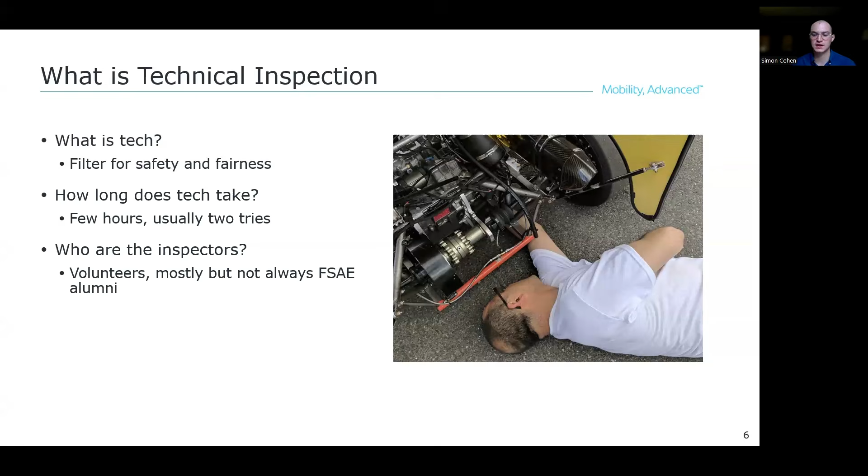Now, a quick overview of the actual process of going through tech. Tech for the EV event is going to be like an assembly line. You start at one end, you go through each station. At each station, you will be teched on one particular aspect of the car. One or two stations, usually at the end, will be EV powertrain tech. This is where I will be. I will have seen all of the powertrains of all of the cars that have come through that day.

So let's talk about what you can do now to make sure that you breeze through tech inspection. This is general advice, not necessarily specific to powertrain. The best advice is to give yourself a buffer. Don't build to the edge of the regulation. If you're close or you're barely over, it will take extra time during tech inspection to figure that out. If you build to the line today, you will likely be over on the day of competition.

If the rules say that you need an inch of clearance, please give yourself a little bit more. Now, be extra vigilant and extra critical. You can always do the inspection yourself and see what parts pass and what parts fail. It's common to have alumni come in and help with the inspection checklist. We all know that alumni can pick apart their team's car like no one else.

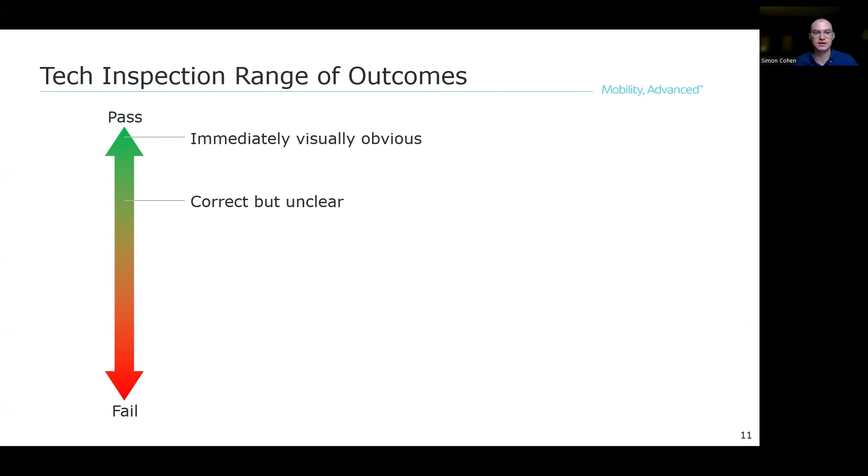There's some stuff that's correct, but it's a little unclear. Maybe it's hidden. Maybe it's a little close. I have to pull out a tape measure. And then the things that take the most time are the things that are not strictly correct, but they're safe, they're minor. These are frequently the source of arguments.

This is an escalation to maybe the chief technical inspector. This is kind of the area we want to stay away from. This is why building in that buffer is so important. Then, of course, there's incorrect, but it's unclear. We still have to take that time to figure it out. And then another quick one, immediate and visually obvious. We really want to stay at the top of this.

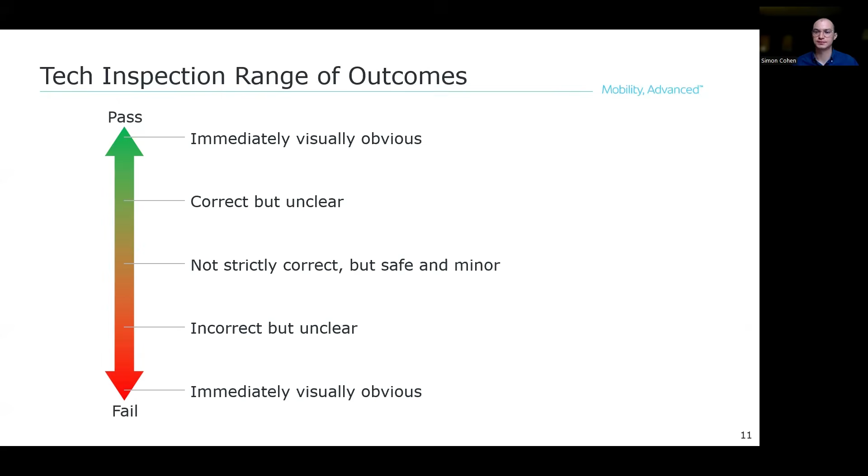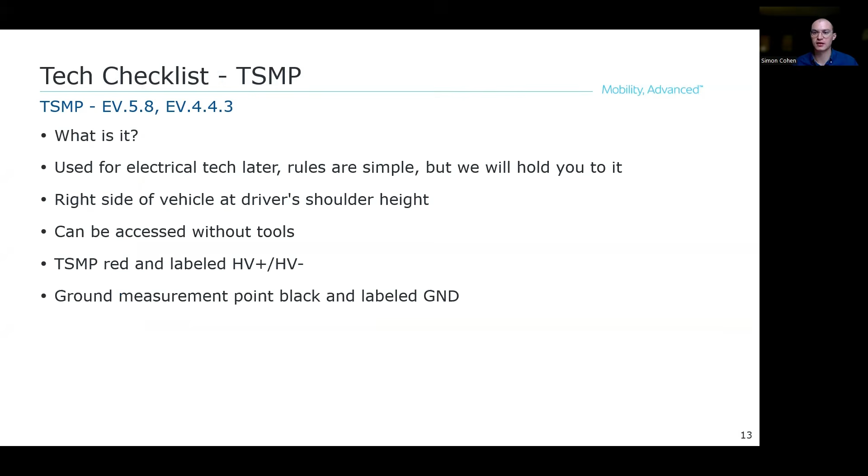So the first item on my checklist is the TSMP. What is it? This is the tractive system measuring points. These are used for electrical tech after you pass mechanical tech, so we won't be plugging anything in. It's got to be in the right location, has to be hand accessible, has to look right and be labeled right. Ground measurement point also has to follow some rules.

Now, you'd be surprised how big of a hurdle this can be. Some things that I've seen go wrong: the wire color, the jack size, the jacks not being shrouded. And weirdly, the biggest hurdle I've seen teams face is just not labeling them. This is one of those things where, again, it'll take 3 minutes to solve in competition. It'll take 30 seconds to do it now.

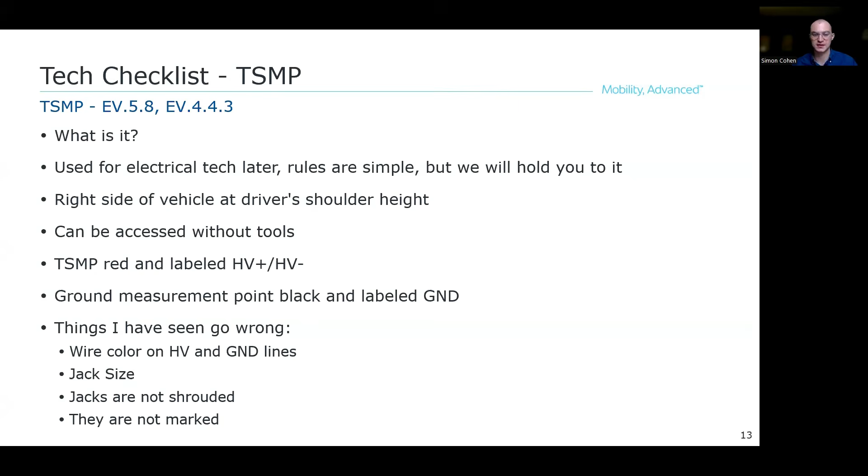Here are a few easy slam dunks. We will be checking your high voltage gloves. If for whatever reason you like using a pair that is out of date or not in good condition, please leave them in your pit. Do not bring them. We do not need to see you use them. We just must see that you own them.

We will be asking what kind of coolant you run. If you use water, say water. If you use oil, say oil. If you say anything else, you will not get your tech sticker. I'm not taste testing your coolant, so this will be done on the honor system. If it becomes clear that you're not using pure water, that's pretty easy to rectify.

High voltage stickers are easy enough. In all of the years that I've volunteered, we have had them to distribute for free. However, as discussed earlier, this is really easy to do now, and it will just suck up some of your minutes at competition.

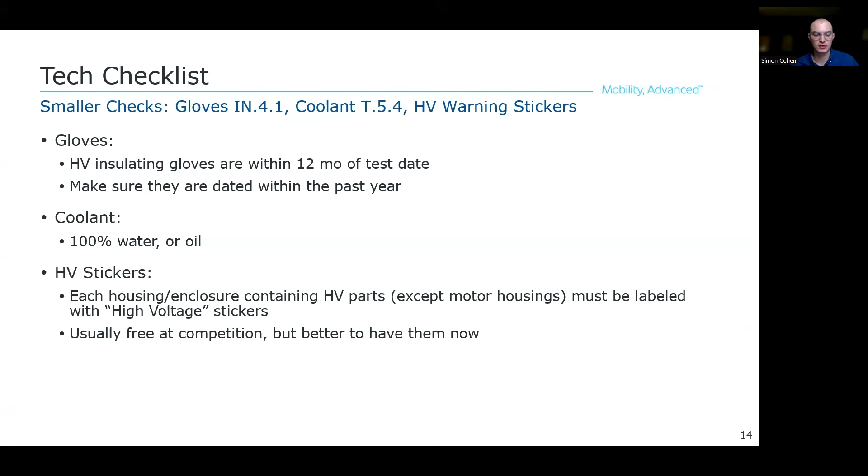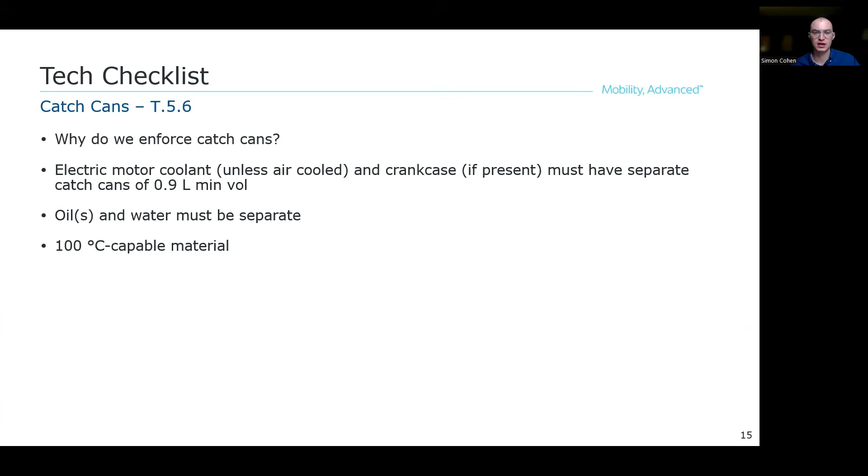Now, catch cans. Why do we enforce catch cans? It's for safety, it's for sportsmanship. We can't have slippery liquids all over the race course. They have to be of a certain size. They have to keep oil and water separate. They have to be temperature rated. They have to be in a specific location and follow other specifications, as well as certain systems need them. You have to be able to demonstrate the two big things to me: how big is your container and how hot can it get without melting.

Let's talk about Nalgene bottles. We are told at tech training to specifically focus on Nalgene bottles. Yes, they're big enough, and yes, they're temperature capable. But if you cannot demonstrate that to the tech inspector, you should not be getting your tech sticker.

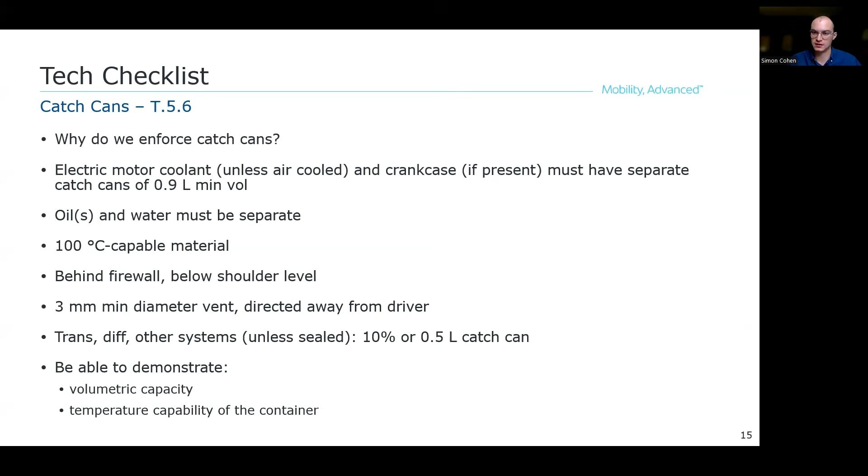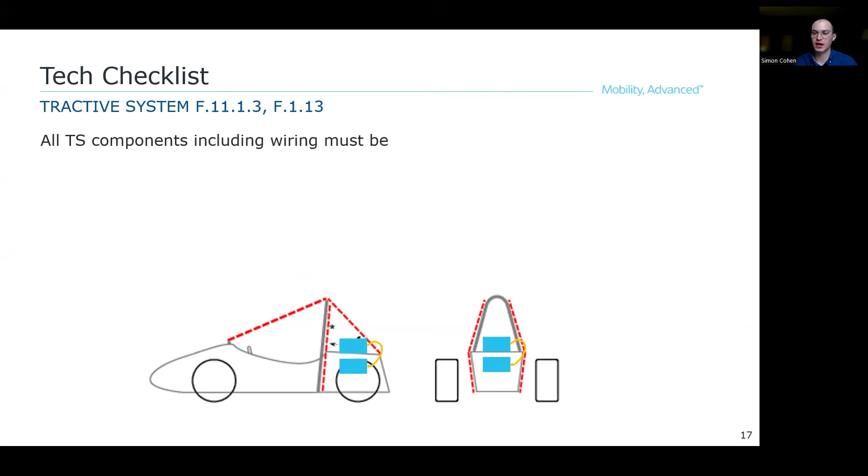So one of the more exciting checks that we get to do is checking that everything that propels the car forward lies within the rollover envelope. Now, this is everything except for outboard motors and their associated wiring, and it cannot be below the chassis. Usually, and hopefully for everyone in this room, the easy part is that all of your hardware, your inverters, your batteries, your PDUs, your controllers lie inside the bounds specified by the rules.

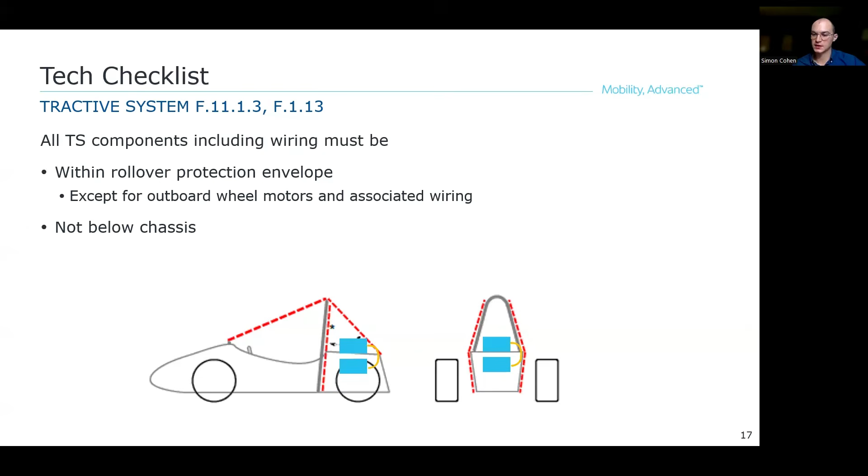What trips a lot of teams up here is the wiring, most frequently the high current wiring. Now, as teams package their inverter for the best mounting and their motors for the best power delivery, everyone has forgot that a 25 millimeter squared wire can have an unfortunately large bend radius. Give yourself some extra space now. Make sure all of these wires are within that rollover envelope. Otherwise, please expect to bring some zip ties with you so you can secure it in place.

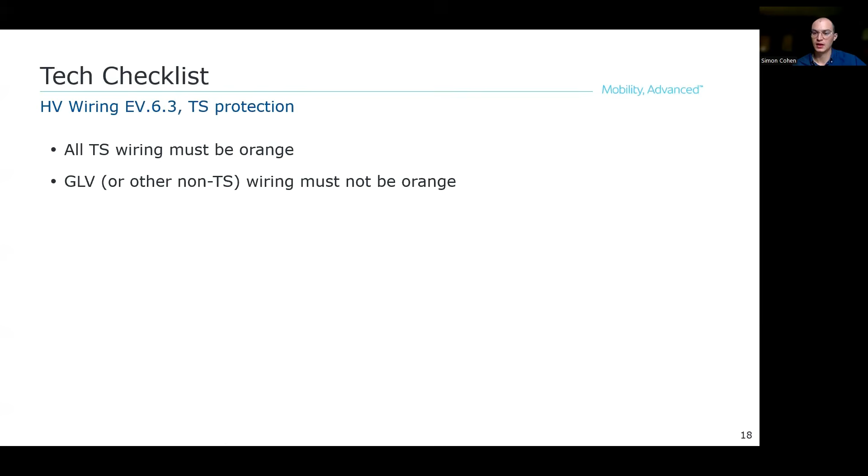Now, the wiring you use for this must convince us that it's not going to fail and it's not going to cause harm. All your tractive system wiring must be orange, and orange cannot be used on non-tractive system wiring. It has to be shielded from damage, and it must have strain relief. And you cannot run your tractive system wiring and your low voltage wiring in the same conduit or connectors, except for interlock connectors.

Now, with this wiring, you must not be able to touch the conductor with a 100 millimeter by 6 millimeter probe. This is a stand-in, of course, for a finger.

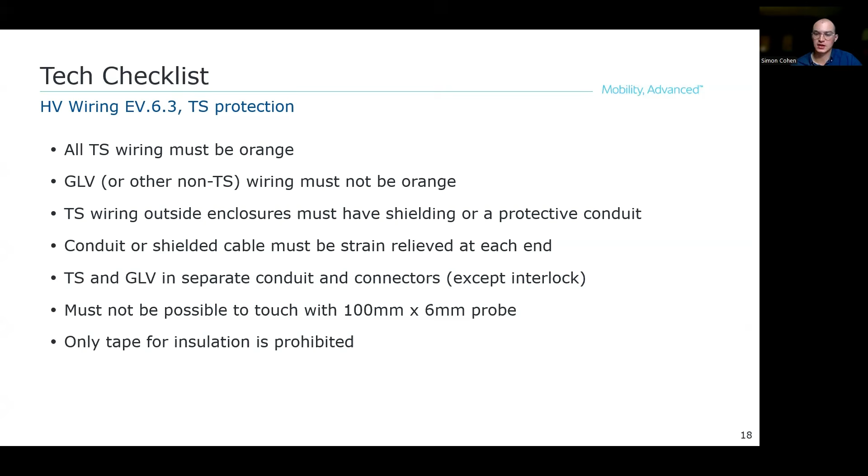Using only electrical tape is prohibited. Again, that's one of those things. Buy the right stuff now. Very easy, inexpensive. If you're at the event on the day and you don't have electrical heat shrink and you don't have a heat gun, this is going to make your life a lot harder.

For outboard wheel motors, now, has anyone watching seen either their team or another team face partial or complete suspension failure? This happened in 2017. This rule is so that your shutdown circuit opens if the wheel assembly is damaged or knocked off of the car. We need to ensure that your HVIL opens in the event of the wheel actually coming off the vehicle. I will be quite harsh on this. Others may be less so.

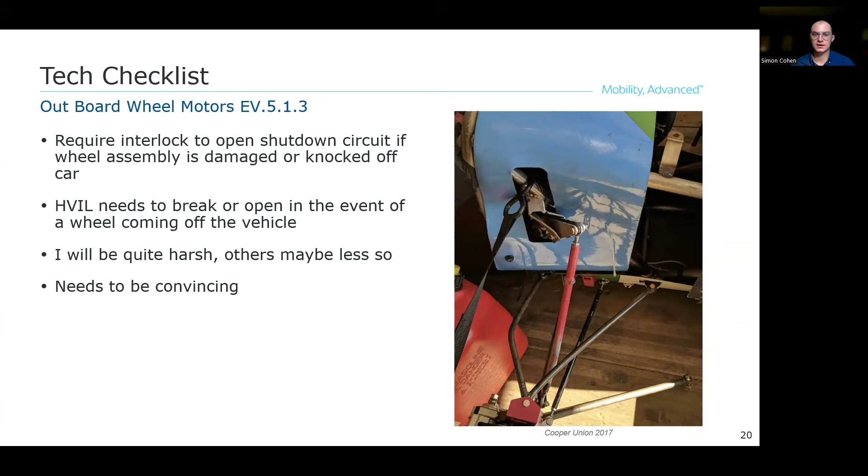The main thing about your HVIL is it has to be convincing. We'll go through a little bit about this next. There are really only two different methods that I've seen for this. One is opening the circuit by either unplugging a connector or actually ripping the pins out. The other is designing the HVIL wire to be cut, sheared, or snapped in the event of a crash.

Major issues that we see during tech: the HVIL is loose, unconvincing that it will actually open in the event of failure, or using inappropriate plastics. Fishing line, etc., will soften, it will weaken, it'll stretch.

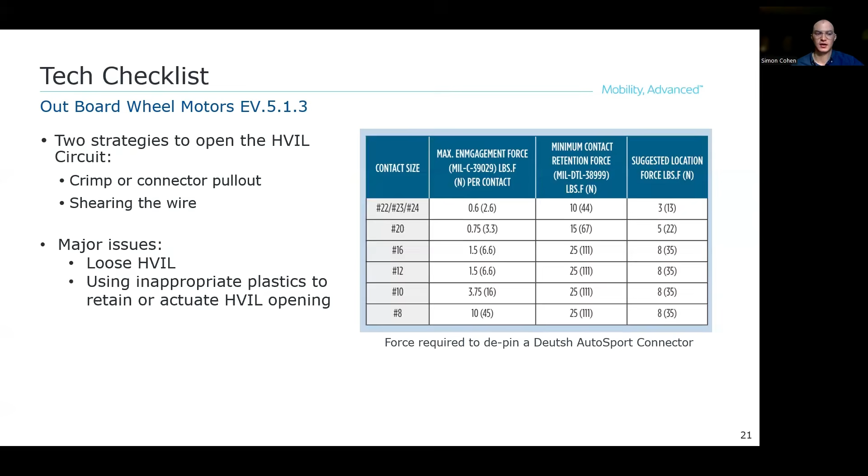One of the more time-consuming checklist items can be your grounded low voltage fusing. All of your wiring must be protected with a fuse that is less than or equal to the ampacity of the wire itself. This can be really time-consuming to tech. And not only does this apply to wires, but also to any PCBs that carry your GLV power and the traces in them. So please be able to give us the ampacities of your PCBs. Usually we recommend having a spreadsheet or a printout, a document that you can bring with you. These are the big things. You need to be able to demonstrate your fuse rating and the ampacity of the wire. This is made easier for you frequently and much easier for us always by having a centralized fuse box.

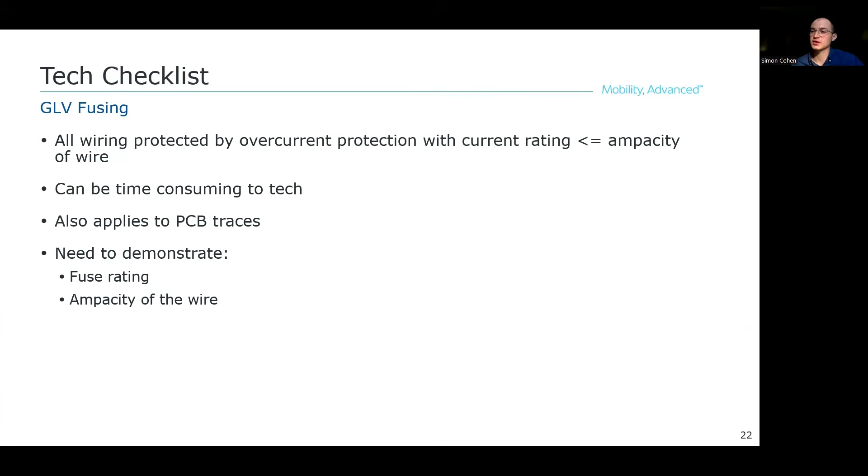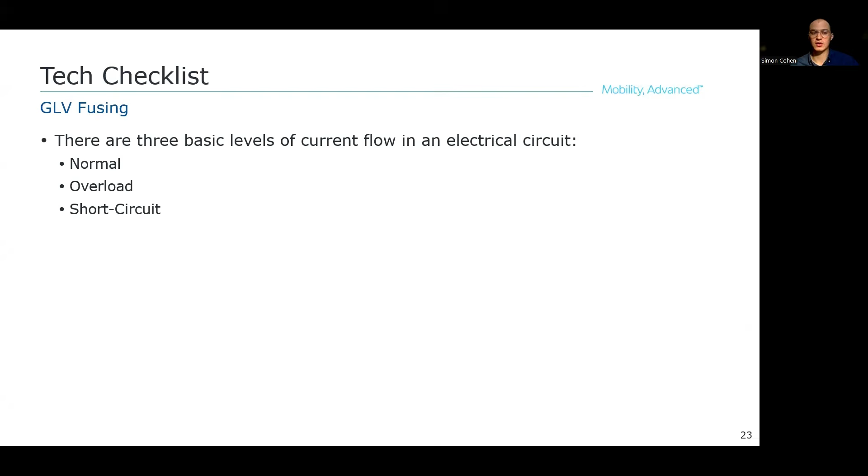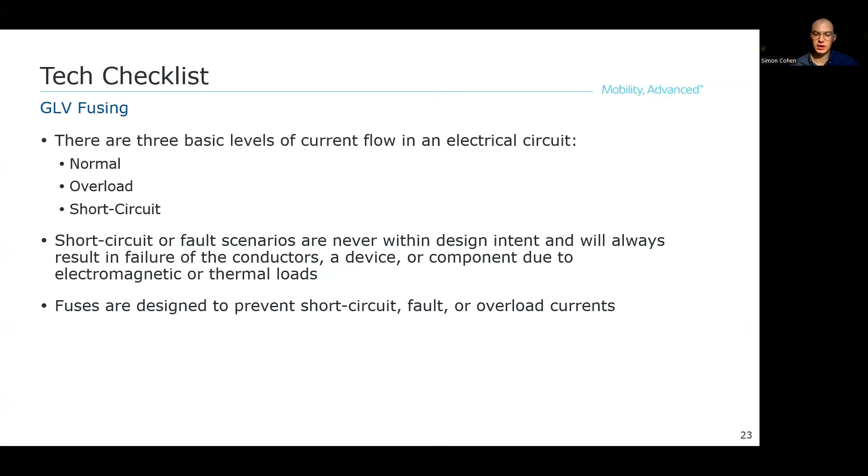Now, let's go a little bit through what fusing actually is. There are three basic levels of current flow in an electrical circuit. There's the normal load, nominal load. This is what you design for. There is the overload condition. This is sometimes a little bit extra load if you have a large inductive component, maybe a motor somewhere in your circuit. And then there's the short circuit condition. This is 10 to 100 to 1,000 times your normal load. Short circuits, sometimes called fault scenarios, are never within design intent and they will always result in failure, usually due to thermal loads, but sometimes due to electromagnetic loads. Fuses are actually designed specifically, usually to prevent short circuits or faults, and very rarely to prevent overload currents.

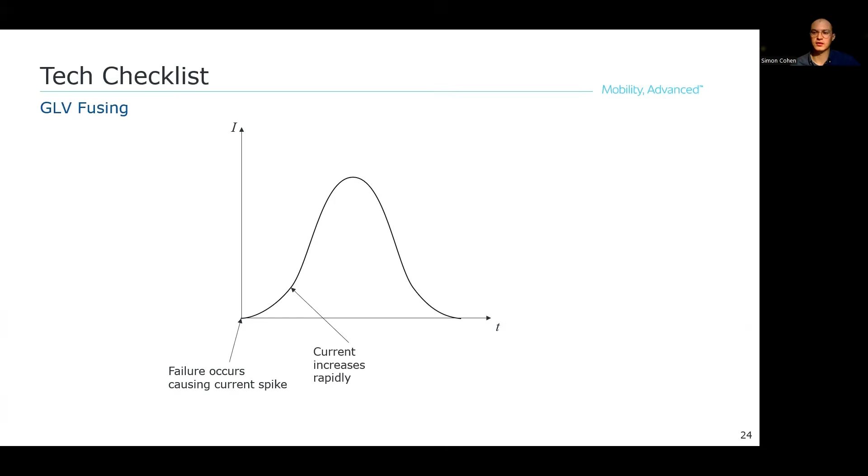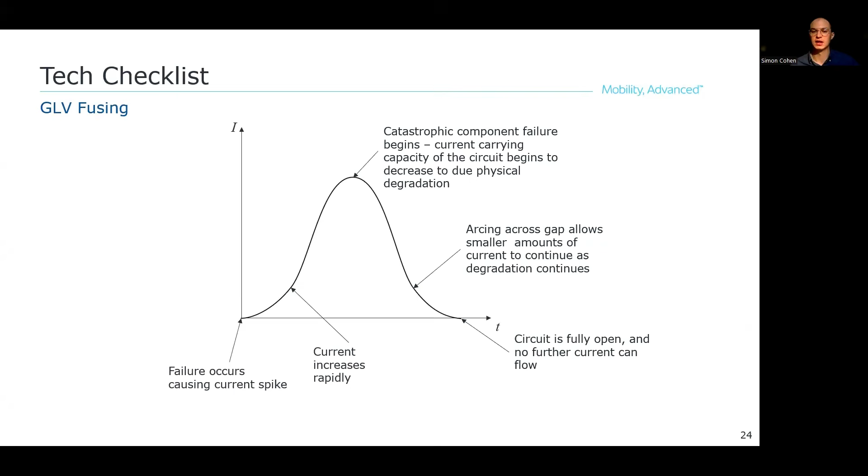We can walk a little bit through an electrical overcurrent failure. At time zero, your failure occurs, causing a current spike. The current will increase rapidly until you get this catastrophic component failure. The actual current carrying capacity of the component that's failing will start to decrease. This will be material melting, arcing, sparking, degradation. It will eventually open a gap and arc across that gap. Because the arcing is damaging, it'll continue to widen that gap and allow smaller and smaller amounts of current. And then eventually the circuit will be fully open, some component will be fully melted, and no further current will flow. If you put a fuse in there, you can have a failure that occurs causing a current spike, and the fuse will melt way before anything else, and the circuit will open safely.

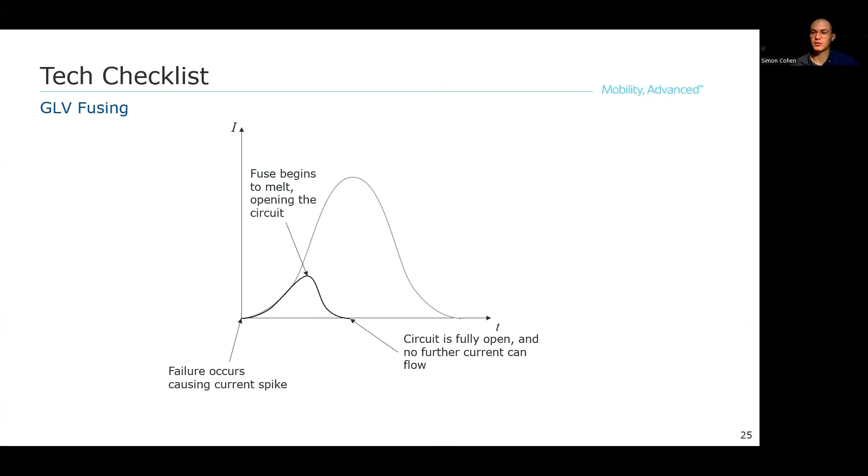So let's talk about infamous critical fasteners. These are bolts so identified such that if they were to fail, catastrophic or potentially dangerous events could result. Now, unsurprisingly, your battery falling out of the middle of your car in the middle of a race could have catastrophic and potentially dangerous effects. So we make you jump through some hoops to prove that these kind of bolts won't fail. They have to follow specific rules.

What kind of rules? What do we need to make sure these bolts won't fail? We need to make sure they're strong enough. This is both grade and form factor. This is the head shape. Make sure you can actually apply the torque safely that you're intending to use. Length, these have to be 2 threads past the nut, as well as anti-rotation or positive locking features.

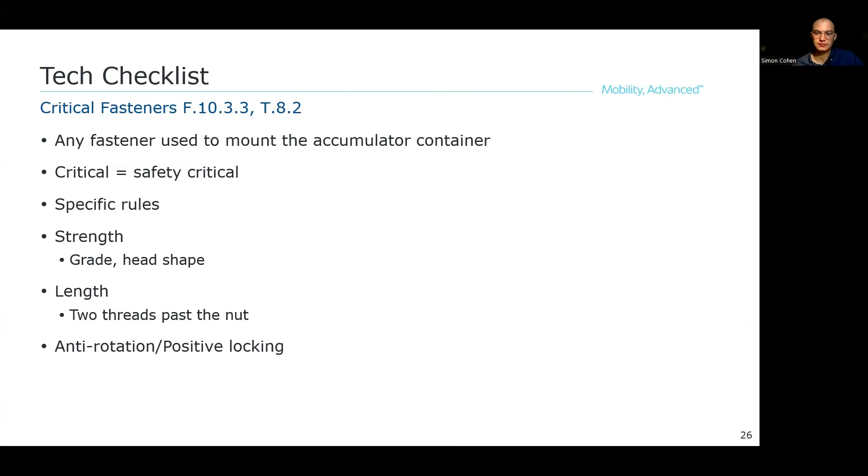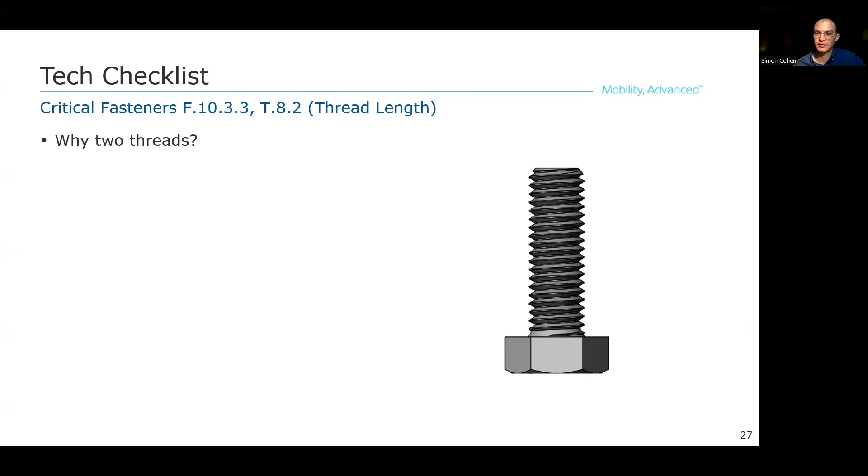Now, I think adequate bolt length seems like it makes sense intuitively, but why is 2 threads the right number? Why not 5 or 10 or 20 threads? This is because you're almost always using rolled bolts. Bolt threads are rolled, which means that the first 2 or 3 threads are allowed to be, and frequently are, imperfect. This is not always a bug, and frequently these partially formed threads are a feature. They assist in locating and starting the bolt properly to avoid cross-threading.

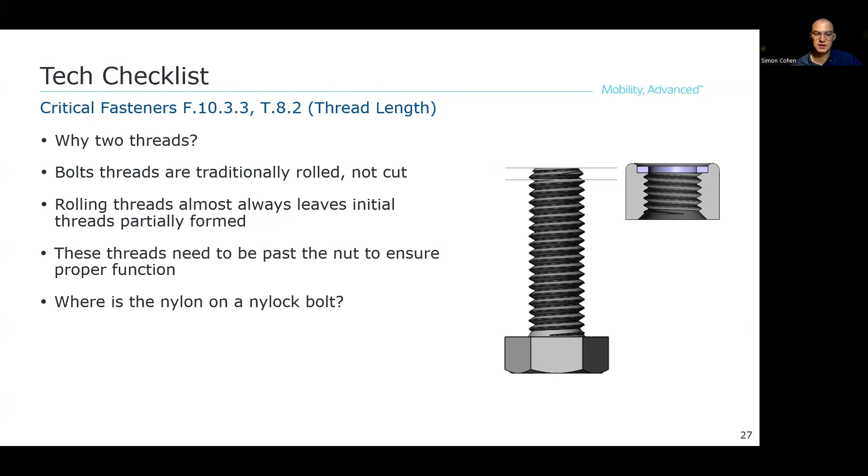Now, if these imperfect threads are not outside of the nut, the bolt is not being used as designed, and we actually can't assume the performance of the joint. If we look at the cross-section of a nylon lock nut, the locking feature is right at the top. So if your bolt is flush, that's right where your 2 threads are. The nylock might not even deform. So that's why we require those 2 threads past.

Everyone's favorite, safety wire. The fundamental idea is that the wire holds the bolt from rotating. Now, how do we accomplish this? First, the bolt head needs a hole in it. You can do this yourself, or as we've mentioned previously, if you have the foresight, you can buy them pre-drilled from McMaster, Aircraft Spruce, or a number of other suppliers. The wire should be wound in such a way so that if the bolt were to come loose, it would have to increase the tension on the wire. For a right-hand threaded bolt, this would look like a Z.

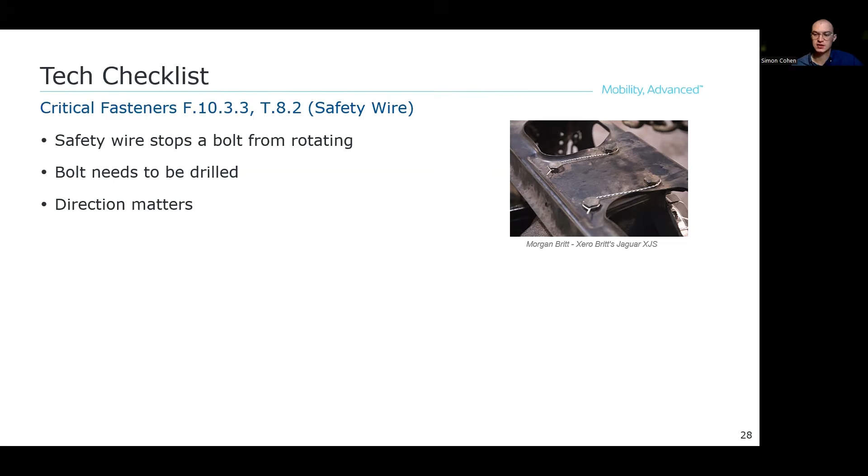The wire should be twisted to be taut. Not that we will be testing your tension, but it should be visible. And lastly, please fold the sharp ends out of harm's way or cover them with tape. Now, often minor errors will still pass tech inspection. We are not requiring aviation grade safety wiring, but it will behoove you and it will behoove a lot of us if you do it correctly.

And lastly, it's generally not recommended to safety wire a bolt that is retained by a nut. If something were to induce the rotation of a bolted joint and the bolt itself, but not the nut, cannot rotate, you may or may not be facilitating the opening up of that joint.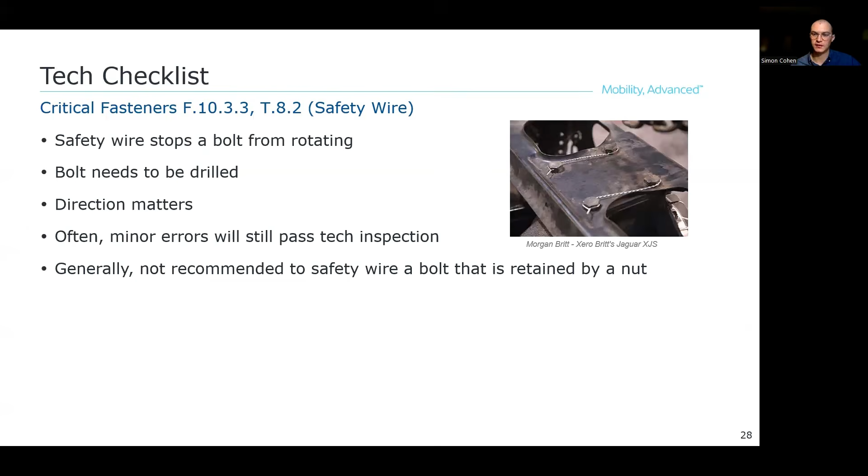Now, we get to inspect your high voltage connections. Most off-the-shelf electrical connectors get a free pass as long as they pass the smell test. The thing we are really checking here is your bolted connections. These are usually, but not always, between or to bus bars or at a junction point. The bolted connection must have positive locking, but notably, these are not technically critical fasteners.

Now, soldering is not allowed in the high current path. The important information behind many of the bolted connection rules is that the current must pass from conductor to conductor rather than via the bolt or an intermediary like solder. I'll dig a little deeper into the theory behind bolted joints and why it's such a big deal.

In an ideal world, the metal-to-metal contact between two flat pieces would transmit electricity across the entire surface that's in contact. Now, unfortunately, as many of you may be aware, we are forced to live in the real world, where when we zoom in far enough, neither piece of metal will be smooth, especially if it's spent most of its days in an FSAE garage. This means we must rely on very small areas of contact called a-spots to carry all of the current. This means resistance will actually be much higher than predicted.

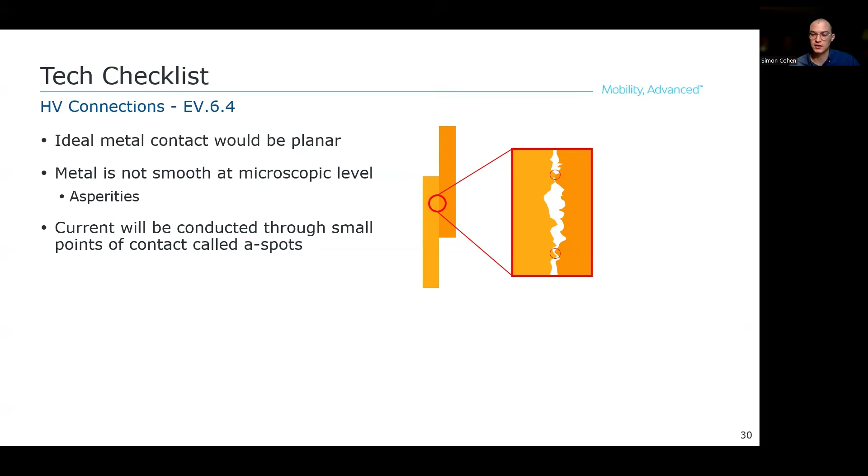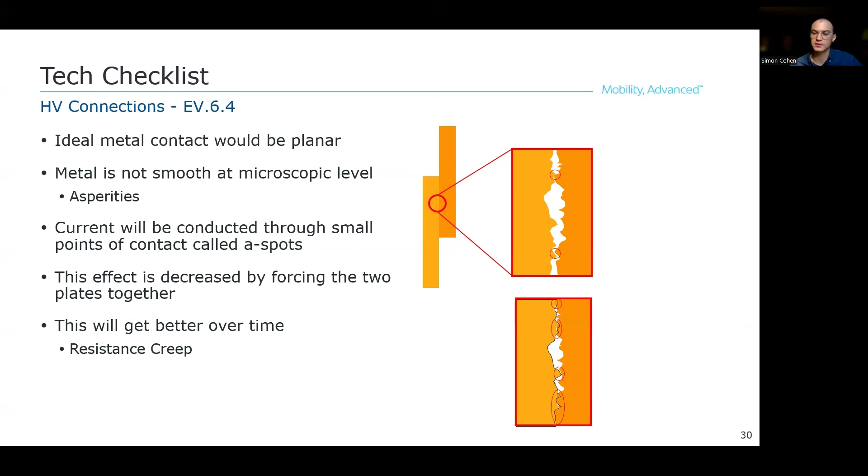This becomes a potential area of very high heat generation. Besides thermal failure of nearby components, this may also lead to the failure of the bolted connection, which may in turn increase the resistance. This effect is decreased by forcing the two plates together. Now, luckily for us, this will get better over time. So it is important to properly design your bolted connection.